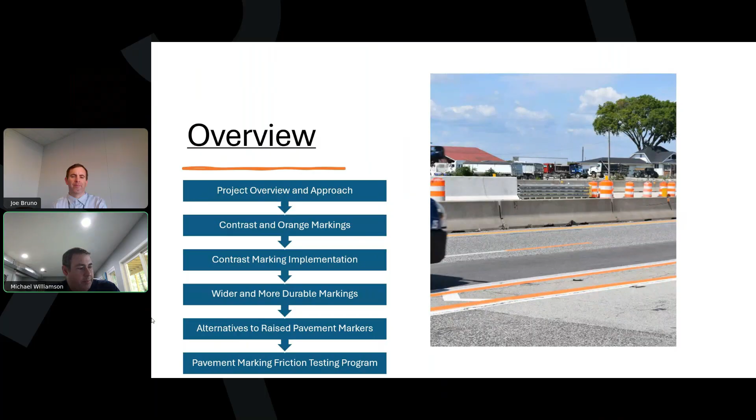Okay. So here's an overview of what we're going to be going over today in our presentation. I'll give you a brief overview of everything and our approach to our analysis. We looked at both contrast markings and orange markings, so it's two separate things. I'll present some research results on both of those. And Joe's going to get more into contrast marking implementation in Indiana, wider and more durable markings, looking at the alternatives to raised pavement markers to help people see the lane lines, and then the pavement marking friction testing program that they have.

All right, so the overview and approach that we took for the research part of this. The typical standard literature review was conducted for both contrast and orange markings, to try to identify the current status of everything. What have people already determined about contrast markings and orange markings, and what is lacking? What do we need to do more research on? What do we need to figure out?

One of the other things we looked at was the machine vision capabilities. A lot of cars on the roadways now, and a few years back when we conducted this experiment, were starting to have lane departure warning systems on board. It lets people know if they're starting to shift out of their lane. It either beeps, gives you a vibration in your steering wheel, or lights come on to get your attention to try to reduce those lane departure crashes, which is where this striping helps. So we wanted to make sure we incorporated that testing, at least in some capacity, to make sure we weren't doing something that was going to cause problems on the roadways. We didn't want to put a stripe down if vehicles didn't know what to do with that.

And then also we're studying the driving behavior. What do drivers do when they go through a work zone and see orange striping or the contrast striping versus the typical striping? As part of this, we had to go through Federal Highway approval. It's an experimental process with the orange markings, so it's not something that was available to use. We had to get permission.

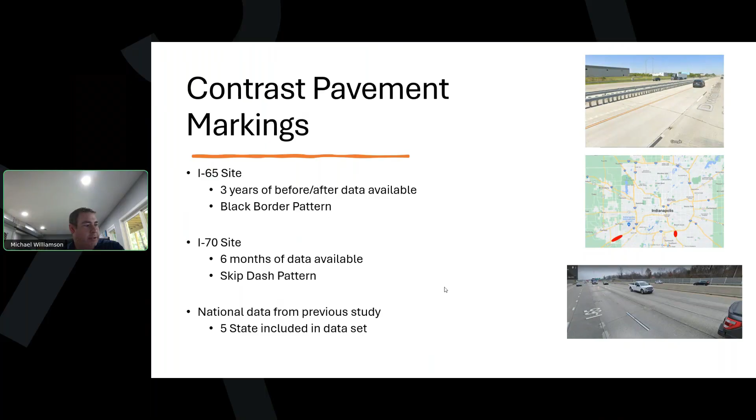And we're comparing this to a national study that had been recently conducted that included data from 5 other states with multiple years. So for both of the analyses, the contrast as well as the orange markings, we took more of an empirical Bayes approach, or the Highway Safety Manual predictive method approach, to identifying what the safety benefit was. So using safety performance functions, taking into consideration ADT.

So if it had a before and after period, I was pulling the ADT in the before and the after so that can be a consideration as well, because we know the more exposure, the more risk of crash. So we wanted to account for everything that we could account for to isolate what we were testing. And then also segment length, looking at the expected crashes using a weighting method.

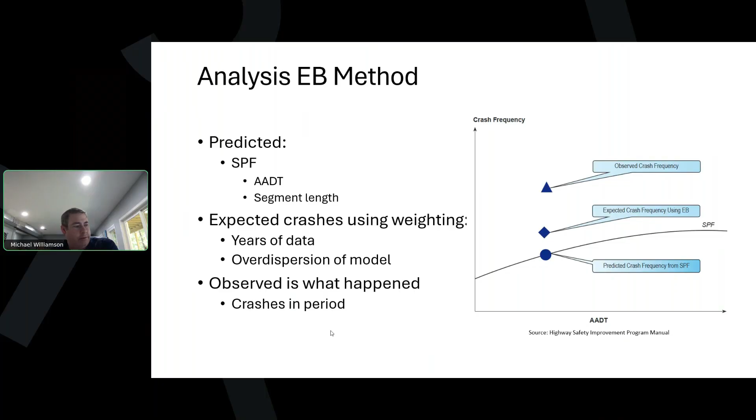So the one location for the contrast was down for 3 years. That got a lot more weight in our final result than the one that was only down for the 6 months period. And then, of course, the overdispersion of the prediction model was taken into consideration as well. And then we observed crashes in our before and after periods.

So with this, we were able to go through and develop crash modification factors for the contrast and the orange. So looking at our before period, our expected versus our predicted, and then the observed. And you're probably familiar with this. It's been out for a while. Don't spend a lot of time on it. But this is just the approach we took.

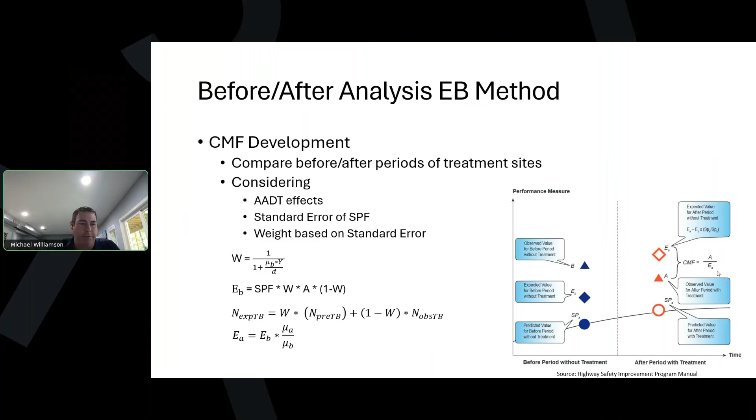And then the final result, we're looking at the expected value of the crashes in the after period without a treatment and comparing that to the actual observed. And then that calculates our crash modification factor. So we're doing our best to isolate out just the change that we did to the roadway and what was the safety benefit of that.

So for our contrast pavement markings, our target crashes we're looking at are lane departure crashes. So commonly sideswipes, fixed object, or overturns. So not looking at when traffic was backed up and there were some rear ends. That has nothing to do with the striping. It has to do with congestion. So isolating those few crash types, and then combining the different locations we had together.

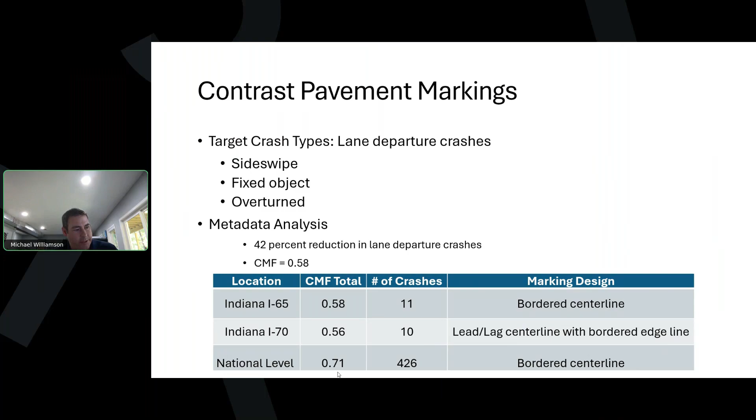So we had 11 crashes at one site we were dealing with and 10 at another. And combining that together, we showed a 42% reduction in lane departure crashes. And compared to the national level CMF, we compared a 0.71 versus a CMF of 0.58. So pretty similar results. And the national study had substantially more crash data. So they had many more sites included in those studies.

So for our orange marking, which is really what the focus of the project ended up being on, past just validating the contrast marking benefit, we again went through a substantial literature review, looked at what previous researchers have done. So where was the lack in research? What did we need to do? Identifying different sites we could go implement this at.

We did a survey of the public opinion. So we wanted to know if the public were okay with us changing a striping, putting something new out there. What did they think of that? Testing autonomous vehicles, detection systems, looking at lane position, speed impacts, and then, of course, adhering to the Federal Highway guidance on this experiment as well.

So when we started this, and this has been probably 5 years ago now, only two states had completed orange pavement marking research. That was Wisconsin and Kentucky.

So we had their published reports to look at as something to kind of build on. So a building block, identify problems that they reported having, so we could kind of learn from that and continue the research on and expand it. Other states that were kind of kicking off at the same time as us were Texas, California, and Michigan. And I believe there's a few more that are also experimenting with it nowadays. So we were all kind of at the same time moving forward with this.

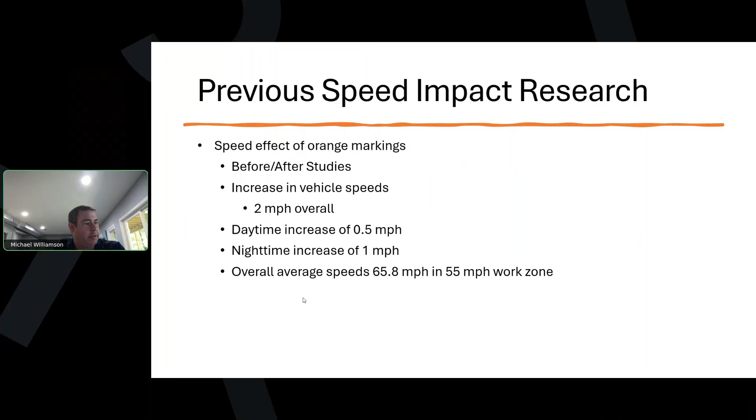Previous research also identified public opinion on markings. Drivers overall preferred them, preferred orange markings in both daytime and nighttime conditions. So it just made them a little bit more aware. And some of the different comments that came out of the surveys we found in literature review, they were more aware of work zone, easier to see. And then a negative comment was it's harder to see in wet nighttime conditions. So it's still an experimental stripe. I know everybody's still trying to identify the optimal product to put down out there.

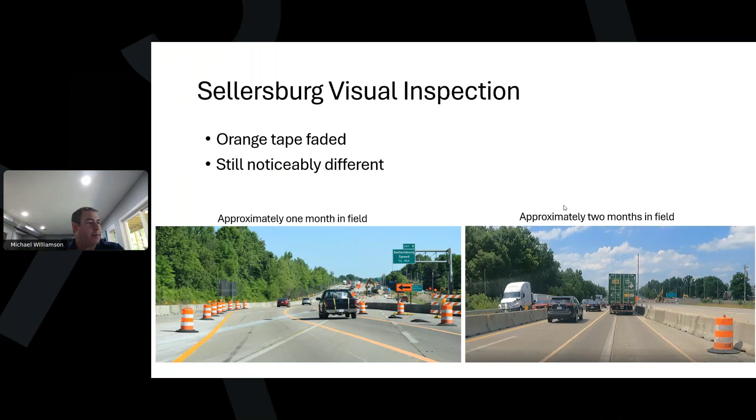The picture here on the left is an example of how much it did fade. So the single stripe to the left had been down for about 2 months, and then on the right there's a double stripe. So this is a point where, moving through the stages of construction, they were restriping some things. We're able to leave some of the existing tape and then put some new tape down, and you can tell the noticeable difference there between 2 months versus a 2 week exposure. So as part of this we tested the color and retroreflectivity. We took readings and were able to kind of come up with a rough decay rate.

Installation, a couple weeks in, and then it was about 78 days out when the last point was taken. So you can identify your minimum level of retroreflectivity you'd like to have maintained, and you have a rough idea of how long this product could last in the field.

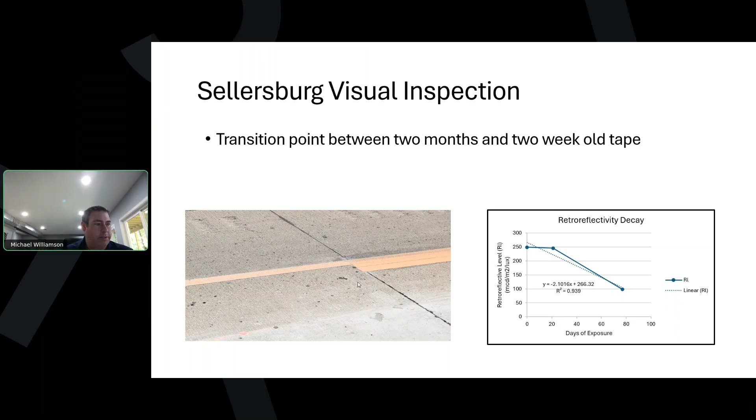So at nighttime, something else we looked at based on our literature review: one of the previous locations had studied and found that there was an impact of sodium vapor bulbs making the orange appear a different color. So we wanted to take a look at night as well and see what things look like. Driving through about 2 weeks after installation, it appeared to be kind of an off-white color, so retroreflectivity was there, so the bead package is working.

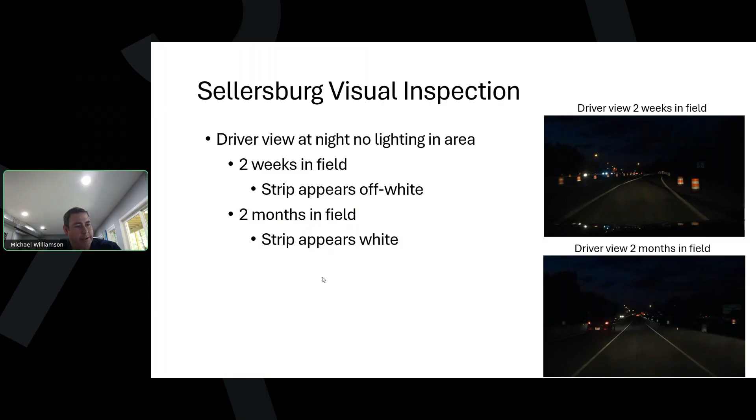About 2 months into the field, it appeared to still be white. It was still visible, but what we found was the beads that were used on this tape were a white bead, so that's why the color was white.

As we move into our next site that we looked at on INDOT's controlled roadways, Lebanon is where this was located. This striping was put down because they'd had a lot of crashes in a work zone, so they did it as kind of a countermeasure partway through construction. So we moved to an orange paint, based on what the tollway was using, to try that instead of the tape that wasn't holding up. The orange paint was matched with an orange bead package that Joe identified.

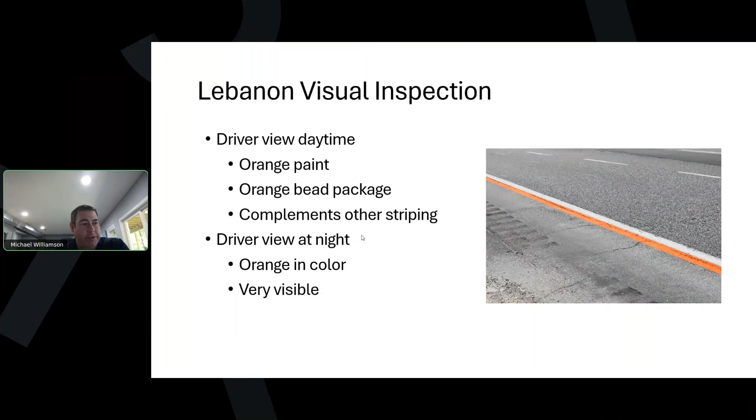And it was used more as a complementary striping. So instead of replacing the striping that was there, they just put it down next to the existing striping to make people a little bit more aware of the work zone and some dangers going through it, and give them better guidance. Driver view at night, it did appear orange in color, and it was very visible. So this was a pretty successful experiment.

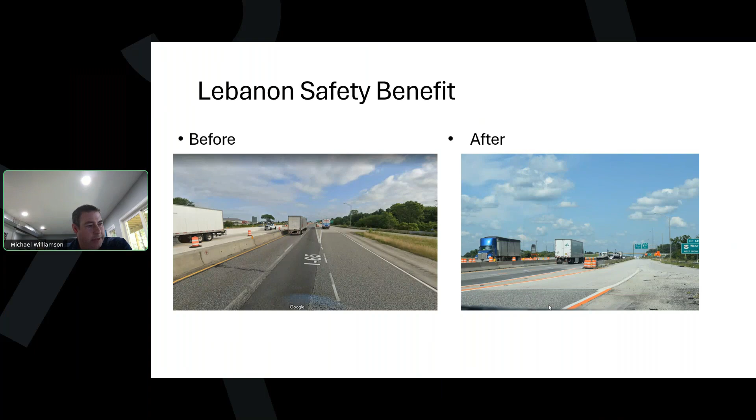And a couple of pictures of that site. This exit is to a U.S. highway, so fairly heavily trafficked there, and people were running into that gore area; that is where a lot of the crashes were, or they would almost hit that and swerve over and hit one of the barrier walls. So the picture on the right shows the striping. We were off on the shoulder when I took the pictures for safety, of course, but you can see how that's been striped to just make people more aware.

All right, so as we're dealing with construction, typically a short period of time, there's not a lot of crash data, so you can't go out and grab the typical 3 to 5 years of data before and after. You're looking at a few months. So for this location, in our before period, before we had striped it with orange, we had 3 crashes, and then in our after period, after we made it more visible and provided a little more guidance, we didn't have any more crashes past that point.

All right, so one of our goals was to get public feedback, to make sure the public is okay with our orange markings on roadways. So we created a flyer and a survey, put a QR code on it, and this was placed at a rest area north of the Lebanon work site, which I'll show you next. So we were trying to control as much as possible and just get people that had likely driven through the work zone, and make sure we weren't getting a lot of feedback from people that hadn't.

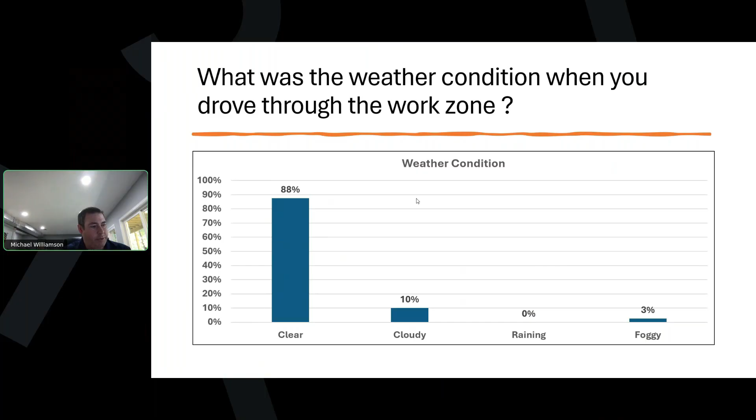So we're just trying to look at weather condition, seeing if there's a preference based on weather. Unfortunately, nobody went through or reported when it was raining, so nobody stopped and took the survey. So most people went through and it was clear, a few cloudy. Time of day, most of them were daytime. We had very few responses at night, so really can't go in and say that people preferred at night or not.

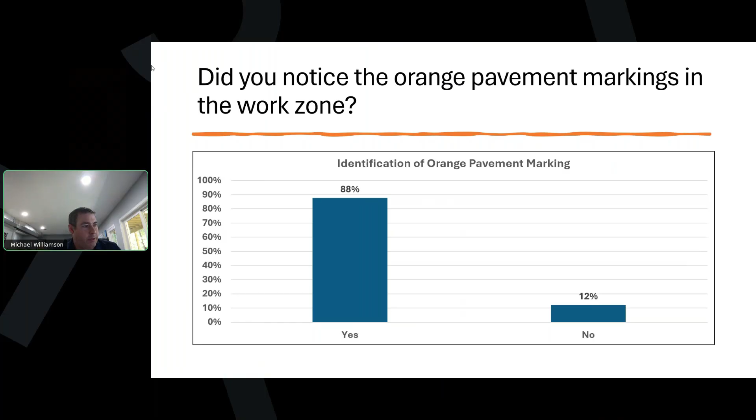Being able to identify it. So did they just notice the orange markings? We asked them, did you just notice them because it's something new? We're trying to get people's attention going through those work zones. So 88% reported that they did notice the orange markings going through. 12% said no. We asked them if it made them more aware of the work zone. So 80% said yes, it made them more aware they were in a work zone. So we're adding more orange to the work zone.

We asked if people thought the orange markings were more visible than white. 81% reported yes. Asked them if they thought it was more visible than yellow. 82% reported yes. So some key outcomes from that: we had pretty good public acceptance. So most people were accepting of it.

Thought it was more visible, made them more aware of the work zone, which is what we're really trying to do: get people's attention, get them to slow down, be more focused when they're going through an area where there's some dangers they need to be concerned with. And then it's just really increasing the visibility of the striping in the work zones.

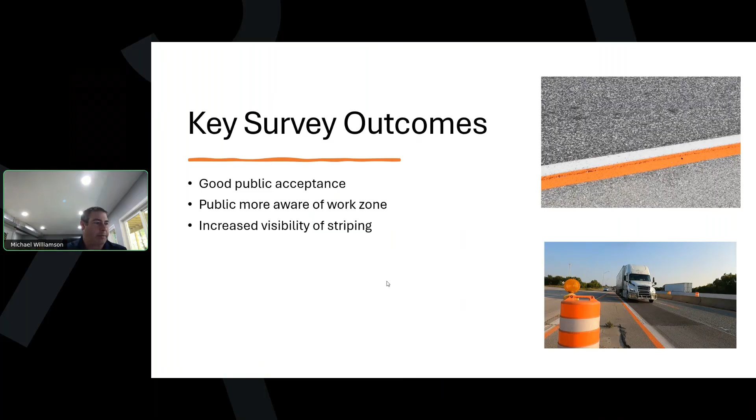One of the other things we looked at, because this came up as a point of concern: what's going to happen with vehicle lane detection systems that are out there? If someone's driving a car and it sees an orange stripe, is it going to know what to do or not? Are they going to suddenly get into crashes in a work zone, and are we going to be liable?

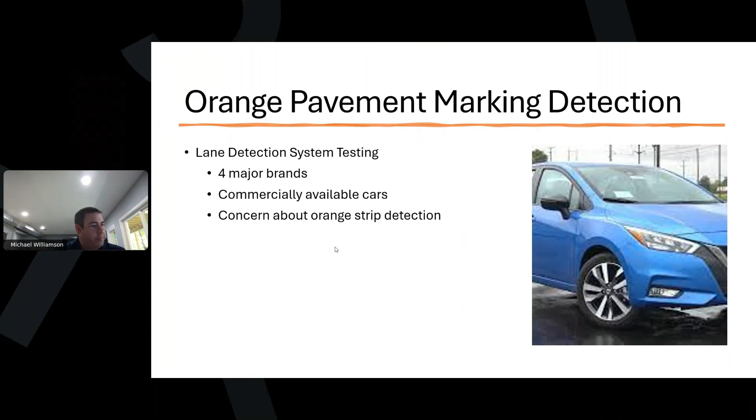So as part of the experimental process, when we would go out and do data collection, I was renting a different car that had a lane detection system on it and would go and test it in the work zone as I was driving through. So just whatever was commercially available at a rental car place, and again just testing the orange striping. Of course I tested other striping colors on the way there and in and around the work zone.

All the vehicles that I tested, and I won't name off the brands or the makes or anything, but 100% detection rate for yellow, 100% for white, 100% for orange. It detected it just like any other stripe, and no detection for the ghost marking. So the stripes that get ground off.

Some things to note on that: the ghost stripings tended to be more centered in the vehicle, and the vehicle's detecting kind of out to the edges. A lot of times it's off of the mirrors on the side of the car. So it's going to have the detection system somewhere in there, and that's where it's detecting it. So if it's something more to the center, it's not going to pick it up.

And as stripes were worn, so locations I would drive through may have been chipped up pretty heavily by snow plows and they hadn't got out there and repainted yet. Some of them probably only had 50% of the stripe actually there. A lot of it was chipped away and it was still detecting the stripe. So no issues with that.

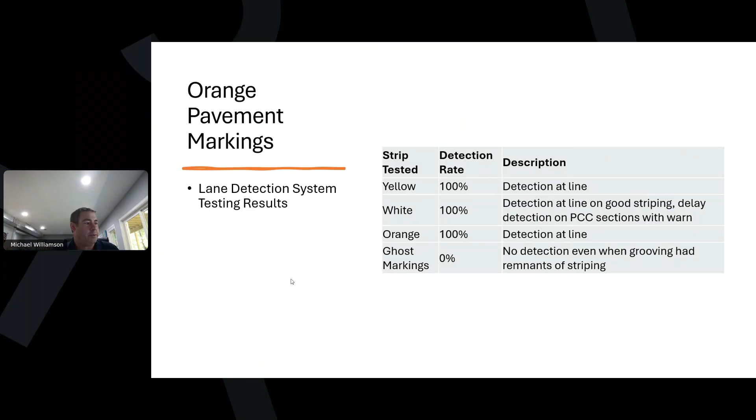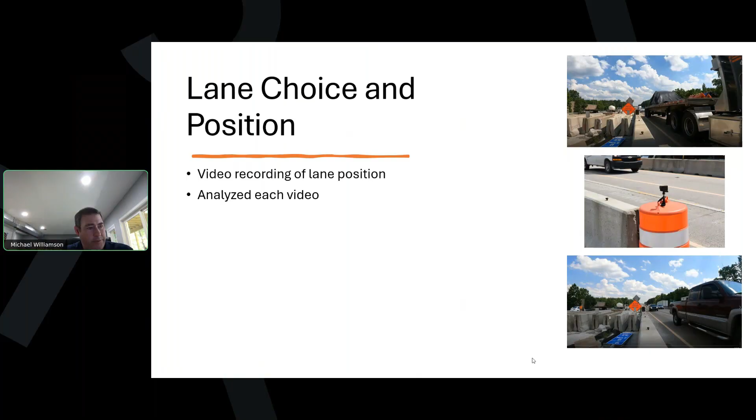Lane choice and position. So I placed a GoPro camera on a barrel right next to a barrier wall and recorded video at the sites, and then took that back and analyzed it, looking at where the vehicles were within the lane, and their lane choice. So we found a nice straight section of roadway, so we didn't want to take that at a point where people just went through some kind of a lane shift or anything. It was well past that.

They were in a straight section. Where were they going to be comfortably located at within their lane? We observed this during some peak hours, fairly heavy traffic, more of an observational method. So I had grad students at the time when I was a professor helping me review the data, and then

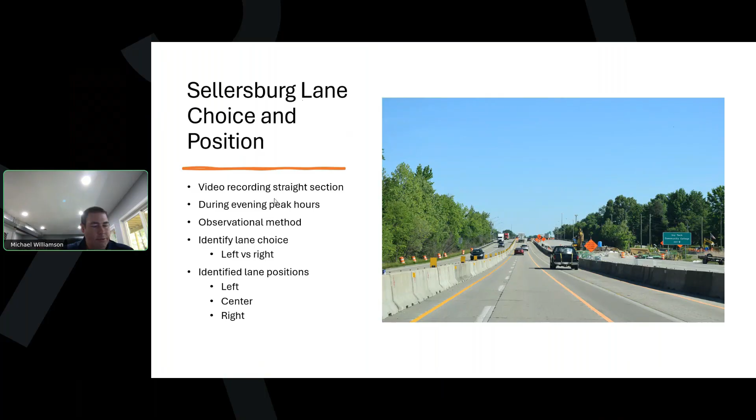looking at how many vehicles were on the left versus the right lane in this two-lane section, and then were they kind of hugging to the left lane edge, the right lane edge, or were they more centered within the lane? So combining multiple people's observations together, we ended up with, for the lane of choice, pretty even. So around 55% in one and 45% in the other, left versus the right.

One of the projects we looked at in our literature review had looked at lane straddling. So if someone was confused about what lane to be in because of this new striping color, and if you look at the picture down on the lower part, you can really see the ghost marking still. It's very visible. You see the skip dash and the edge line. So someone could be confused and think they're supposed to follow that and be straddling the two lanes, so straddling the orange stripe. But we did not observe that at all in our experiment.

And then we had about 0.03% of the vehicles that went through that actually made a lane change in a solid stripe where they're supposed to stay in their lane, so very few lane changes were occurring as well.

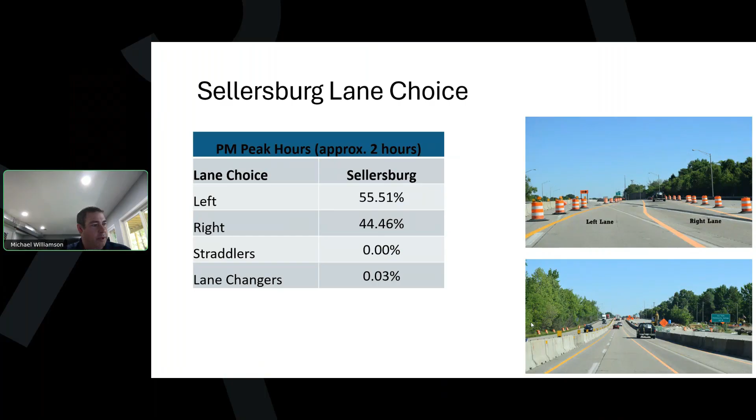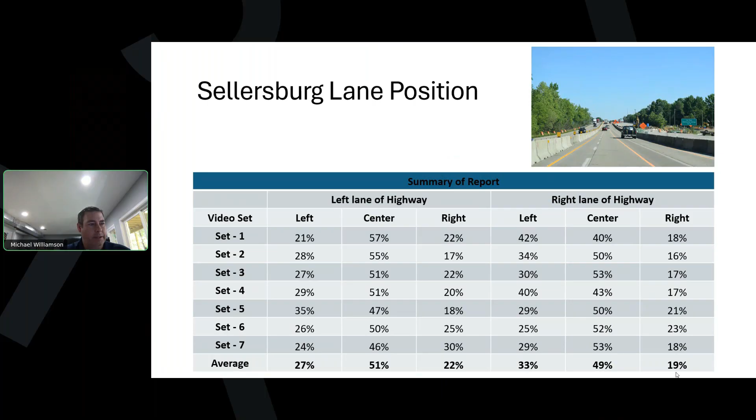Looking at where the vehicle was within the lane. We wanted them to be more centered because then they're further away from striking the barrier or striking an adjacent vehicle; the closer they are to the center, the safer they are. In observations, we had around 51% centered in the left lane, around 49% in the right lane. So they're both being pretty centered in their lane, and then the remaining percentages hugging to the left or the right. The right lane, for some reason, 33% versus only 19% hugging the edge line. So it's kind of unexplained there.

We did a spot speed study as well. So you need to take at least 100 samples in a direction in order to be statistically significant or sure of your results. So we took 200 samples, collected these during a PM peak period, just trying to identify if there's a possible speed reduction benefit to the orange marking. Keep in mind these were posted at 55 miles per hour. At both locations, the northbound was striped orange and the southbound was striped just with the typical striping. So we kind of had a control side to our experiment, adjacent to our experiment location.

The southbound with the typical markings, we found an average speed of 63 miles per hour. And in the northbound direction with the orange, we found an average speed of 59 miles per hour. So a 4 mile per hour reduction. So some benefit there with that. So again, we all know as speed increases, the risk of it being a serious crash increases as well.

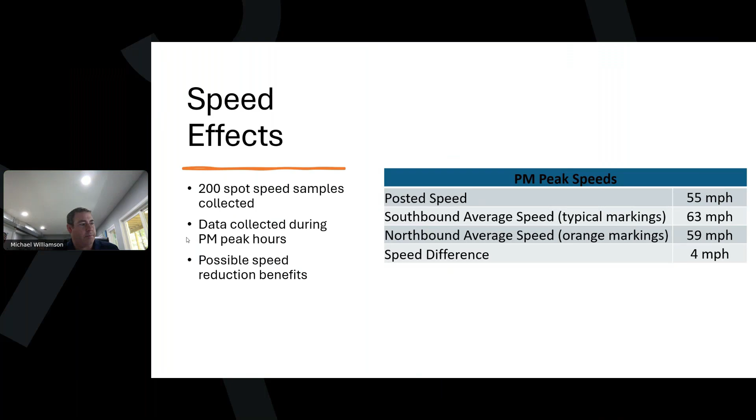And then for the research part of the presentation, our conclusions: we got positive public feedback. So drivers in Indiana that took our survey are accepting of orange markings on roadways. They'd like to see more of those. They're more visible. They make them more aware of the work zones. And then we're getting positive safety benefits. So we've seen a reduction in crashes going through these as well. And then also a positive speed impact. So it seems to be lowering speed slightly. So anything we can do to get people to slow down just a little bit more in the work zones is going to be beneficial.

Yeah, the question I have is for Michael related to the orange pavement markings. You mentioned you saw a reduction in crashes. What did you compare that to? Was that to a statewide average for work zones, or what comparison? Because I assume you didn't do both white or orange markings in the same work zone.

So what both sites actually worked out: at Sellersburg, we had the northbound direction striped with orange and the southbound with white. Same essential work going on in both directions of travel. So we had like an experiment side and a control side, and then the same at Lebanon. Lebanon was more unique because it was at an exit.